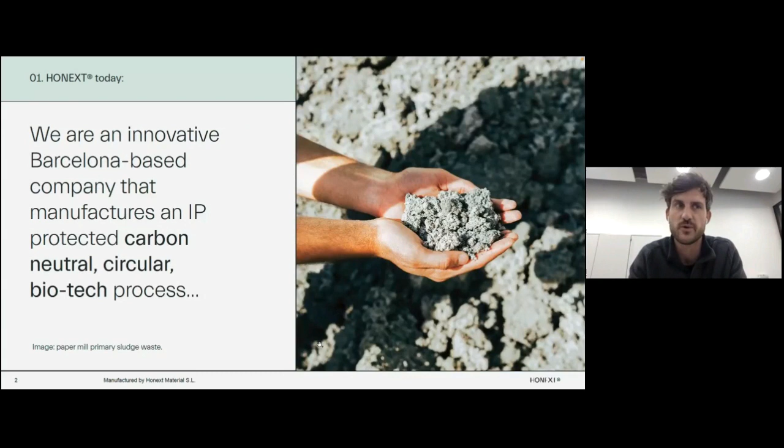Let me share a presentation. I'll explain what we understand as a fully sustainable business model. At Honext, we specialize in a process that upcycles waste fiber into construction materials. We developed a process back in university to transform waste cellulose fibers into boards.

As we'll see, what Esther said in her presentation was totally right. Sustainability can be understood as the raw materials you use, the recipe you use to formulate the final product, and the recyclability of the final product — that's what many companies look at. But in our case, it's an industrial process.

We made one step further and considered how we can scale it up from an industrial point of view, having a positive environmental impact. I'll go through all of them, and at the end I'll show you our proposal to achieve that.

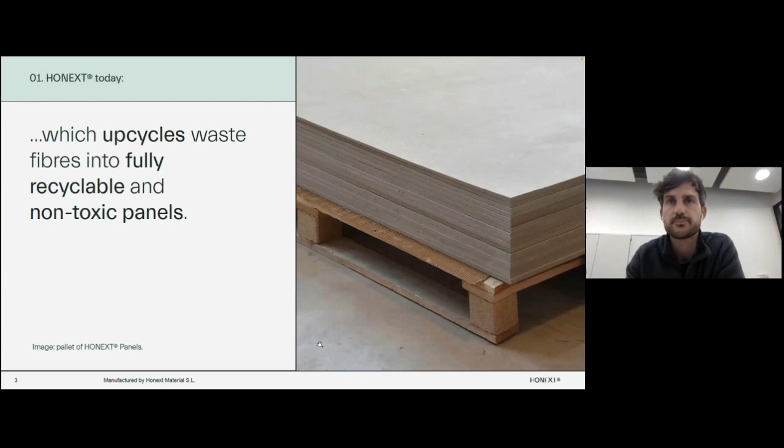To start with, regarding raw materials: we make fiberboards, very similar to wood-based fiberboards, but the difference is that we are using 100% waste as raw material. Our main raw material is what's called paper mill primary sludge.

This is the fraction of fibers that paper mills using post-consumer paper as raw material can no longer use. It's fiber that has undergone too many recycling cycles and has to be thrown away. That's what we take in as raw material.

We also take in a part of post-consumer cardboard that allows us to compensate for fluctuations in the industrial waste we receive. So, to give you a number in mind...

Around Europe, we generate roughly 8 million tons of sludge every year. And the more paper we recycle, the more sludge we generate, because paper recycling processes are very mechanically stressful, and that ends up breaking down the fiber to a size no longer useful to manufacture paper.

Another fact to keep in mind is that normally, for every ton of paper produced, we make between 50 to 100 kilos of sludge.

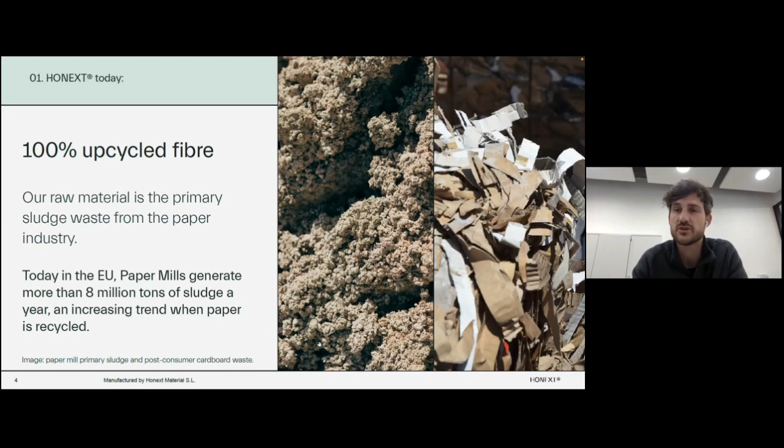So we take this sludge, mix it with a fraction of cardboard, and then, going into the recipe, we developed a process based on biotechnology that allows us to take this fiber and shape it as a board without using any kind of resin.

I don't know how familiar you are with resins, but they are substances that give great mechanical properties to the product, but have two very negative impacts on its life cycle. First, they have emissions of volatile products that have proven to be carcinogenic to human beings. Secondly, due to the resins, many products cannot be recycled. So resins make great products for one life, but are also slightly contaminant to human beings.

Instead of that, we moved away, and looked at how we can work the fiber with enzymes to improve the natural ability of cellulose fiber to link among itself.

I'm pretty sure all of us have at some point taken a piece of paper, thrown water on it, shaped it, and once it got dry, it had some mechanical properties. It would not just fade away — it kept the shape. That's because fibers, when they're hydrated and then dried, generate hydrogen bonds.

So what we looked at here is how many hydrogen bonds we need to substitute the resins, and how we can generate them. That was an enzymatic process that we developed.

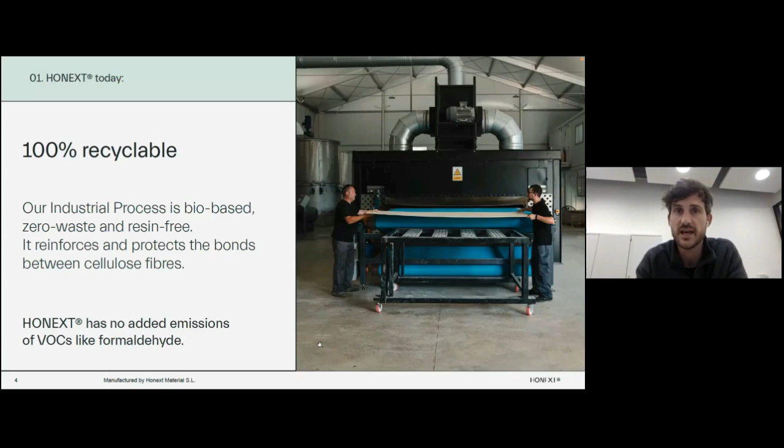And from an industrial point of view, we also thought: okay, so we have the process, we've developed it in a lab.

Where did we decide to set up our factory? We decided to build it in a landfill because there, all the energy we use is decarbonized. We capture the biogas, the biomethane released from the landfill, and that's what we use both for thermal power and electricity.

And the water we use in the process is the leachates. Everything that goes to the landfill that is liquid, we clean it, and that's the water that comes into our process. When we have to clean a fraction of it, we just send it back to our wastewater treatment station, they clean it, and feed it back to us. So all our utilities come from waste, and we don't have any wastewater in the process.

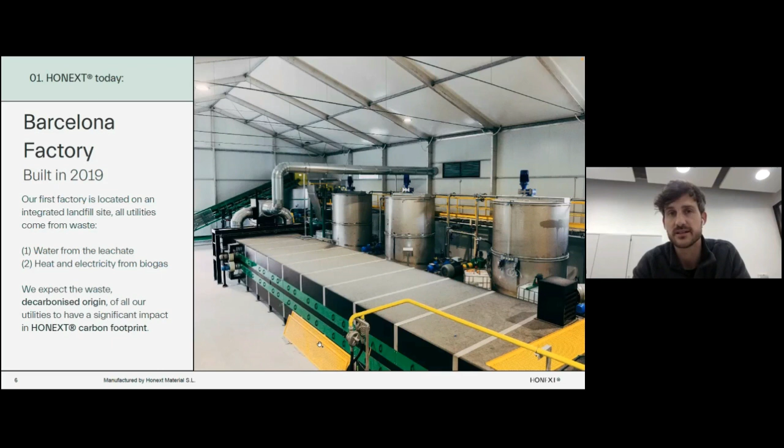This allows us to be, to my knowledge, the most circular fiberboard in the market. We are actually Cradle to Cradle Silver certified, and we are aiming for gold in the next renewal.

It's pretty challenging, especially being made of industrial waste, because Cradle to Cradle is a very strict certification that goes down to all your suppliers. Sometimes, at least the first time, what happened to us was that the waste producer didn't have enough information about their waste at the level that Cradle to Cradle demanded. We expect that they do now, and so that's our idea, to become Cradle to Cradle Gold.

We also have the Green Building Council data sheet that explains the credits we bring to construction projects in the shape of LEED or BREEAM certifications. But again, this is from a sustainable point of view.

Hi. Hello? No, okay, yes, so someone was speaking.

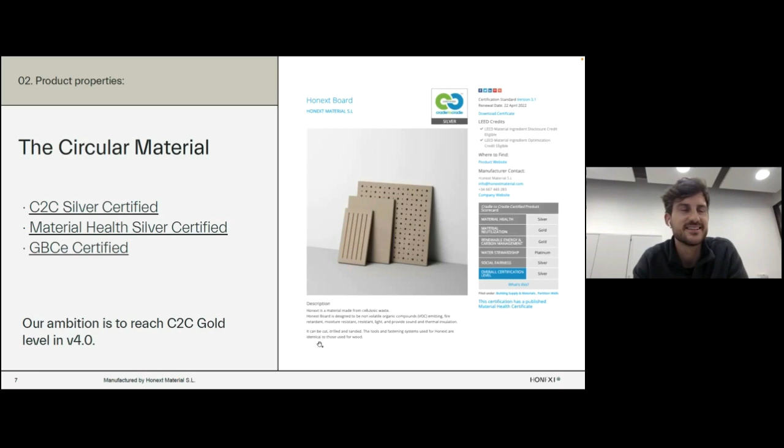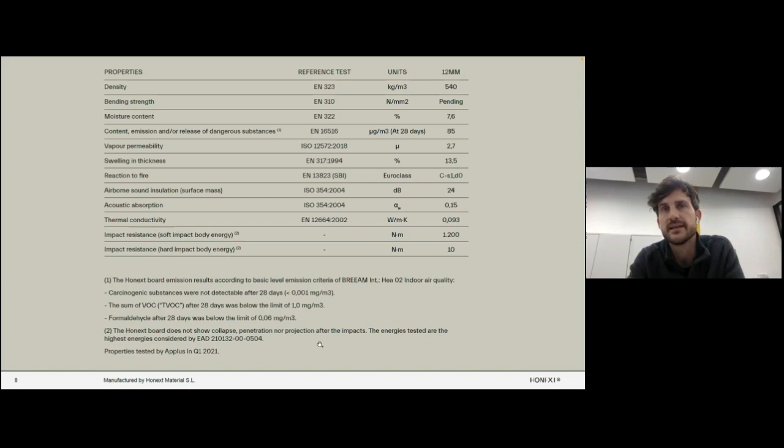From a technical point of view, ours is a technical material, to be used in construction, and this, as you all know, is a highly regulated industry. So we have all our technical properties validated by third parties. Over the last three years, we've been developing with the Construction Institutes of Europe the European standard to cover our material, and this is the way we follow to enter a very regulated industry.

And this is the material. So out of the waste, that's what we make. It's as simple as fiberboard panels of 122 by 244 centimeters to be used in the interior built environment. To start with, as panels for decorative uses, mainly in walls and ceilings, but also for acoustic applications.

The key is that this core has to have the same processing abilities as the current market products, be it an MDF, a particle board, a drywall, and so on. This is how we developed our product, and it's what we have achieved.

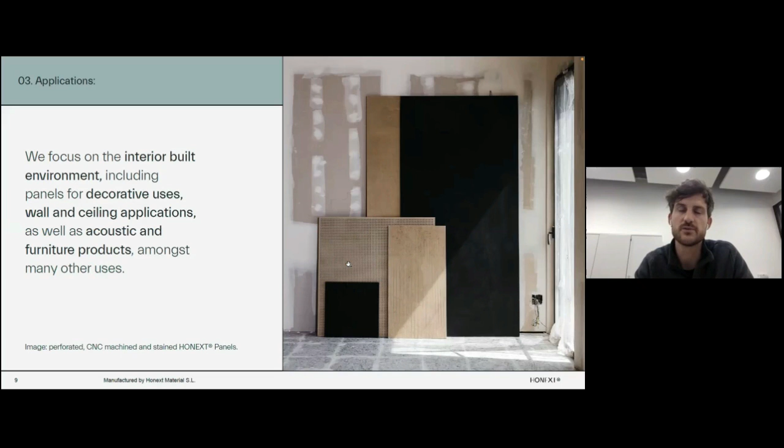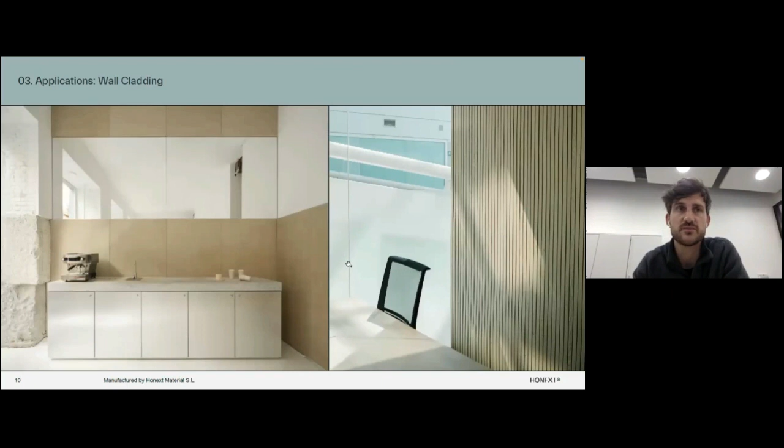Here you can see some of the first applications we've had, as cladding material, in some cases with decorative purposes, as acoustic ceilings, used both as a continuous ceiling as well as acoustic tiles. We've also been used in shop fitting as shelves. Again, it's a material that can be transformed into practically anything thanks to its properties as well as its processing abilities, and this has led to what we are today.

That's the factory. We are manufacturing at three shifts. We have agreements with distributors to put it all over Europe, and the main applications are walls and ceilings. But that's what we have for a 500 cubic meter factory.

That's what we are running right now, but that's nothing in the wood market. The wood-based panel market in Europe is roughly 70 million cubic meters a year.

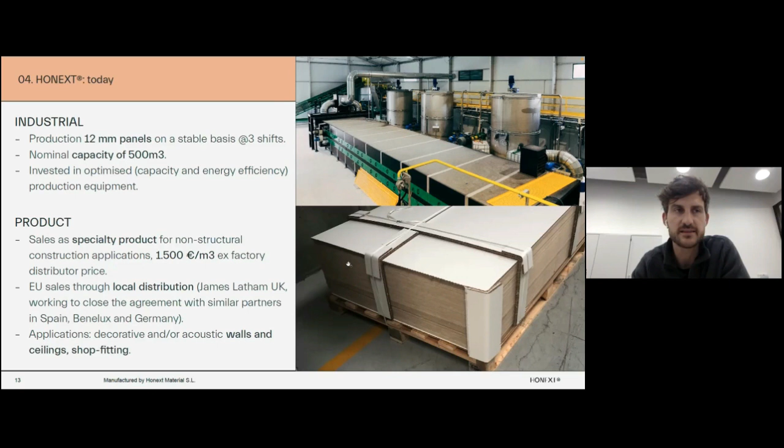So in order to target it, you need to have huge production capabilities, and this is where our business model comes in. We think it's what makes the most sense from a sustainability point of view. As we have developed the production technology, not just the process, the chemicals and enzymes, but also part of the equipment, we own all the intellectual property of it. And we have developed it in a way that this technology can be implemented in a small to mid scale, nearby where the waste is generated. So instead of looking for a huge economy of scale where we put ourselves beside the raw material and make a macro factory there to achieve lower cost through a very large manufacturing unit, we already have the benefit of working with waste as raw material.

What we really targeted was: how can we make this the most efficient possible? The first alarm that came in was that we need to avoid transport, because even though transport from a financial point of view tends to be really cheap, from an environmental point of view it represents a third of global emissions. So it's clearly something we need to work on.

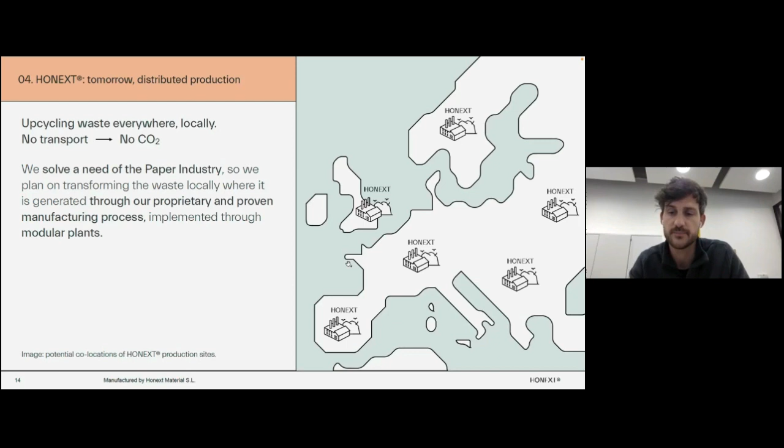And to do that, this is our plan. Currently we're investing in the factory to multiply its capacity by 7, but we're also designing what we consider to be the modular unit, which has to have a 20,000 cubic meter nominal capacity. This number is based on two things: how much sludge a normal paper mill generates, and the market size based on the distributors we work with. That's how we size the factory.

But also, in order to be competitive at a lower scale, the next parameters are key. First of all, our technology - we came up with a clever but simple technology that has a very fast construction time. So we can build one of our factories in 12 months, at a capex rate, considering the low scale, very similar to much larger scale products, which reduces a lot of risk for the one making the investment. The factory itself is very good - we achieve break even at low capacity, which gives it the flexibility to adapt production to the market. And it's obviously a fully automated process.

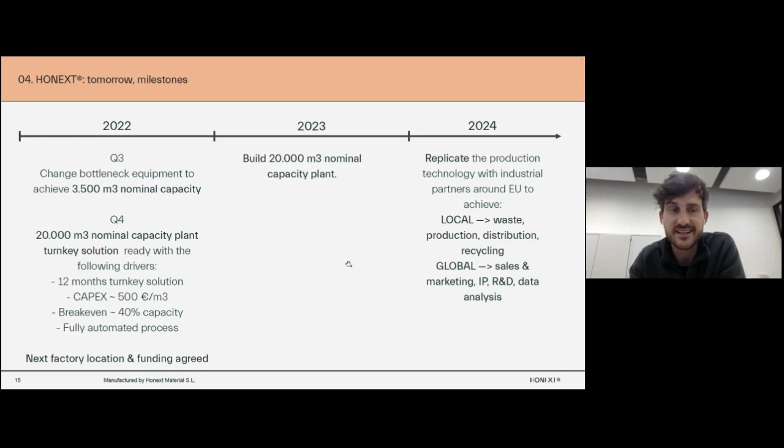This is our roadmap to the market. Our idea is that by next year we will build this first 20,000 cubic meter factory. Afterwards, once we have the network, we'll have a central unit that, aside from managing sales and innovation, will also share all the data from the different factories so they can learn from each other. As they will be modular and replicated, any improvement found in one can easily be implemented in the others. That's how we envision a sustainable industrial expansion from our side.

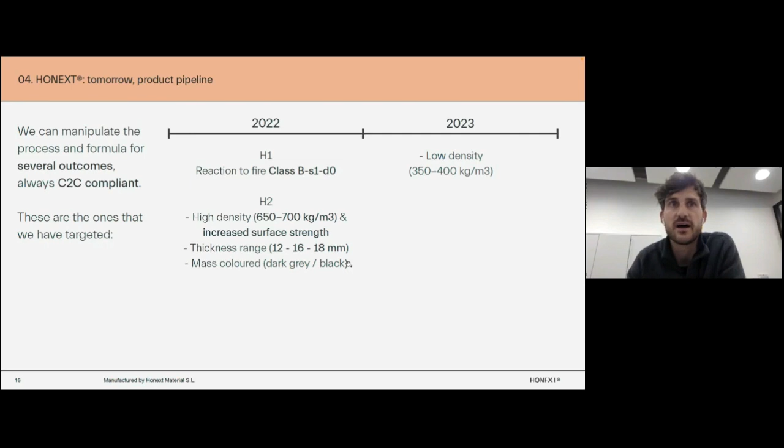From a product point of view, that's what we're working on. We have a commitment to have a 100% Cradle to Cradle certified portfolio of products. We are currently about to launch a Class B, which will allow us to have bigger marketing in construction, as well as meet other requirements made by the building and furniture industry.

And just to finish, this is who we are. Just to mention that we had great support from the European Union back in 2018 that really helped us properly develop both the production technology as well as the product and the required certificates.

Thank you, Paul. Unfortunately, I have to stop you. Sure, it was very interesting.

I will be very short in my comment. I saw that the factory plan is very important for your business model, and I think it was very brave, I don't know how to say it, to plan the Barcelona plant fully green. So it's not something we see every day.

Very good. Well, we have to be - I mean, it costs us more in terms of money, but in terms of everything else, it's who we are. I mean, our name says it all, and it's how we plan on keep on growing.

Thanks so much for being here. Thank you.